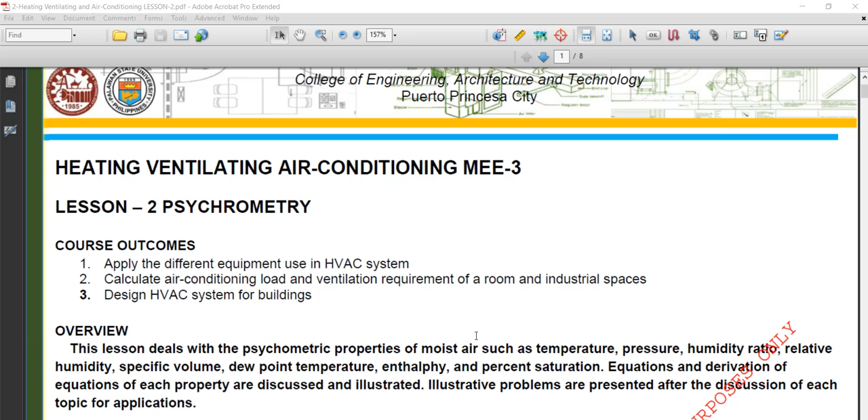So we'll continue our lesson on psychrometry. The overview of this lesson deals with the psychrometric properties of moist air, such as temperature, pressure, humidity ratio, relative humidity, specific volume, dew point temperature, enthalpy and the percent saturation. We also have the equations and derivations of each property that will be discussed and illustrated in the problems presented for this topic.

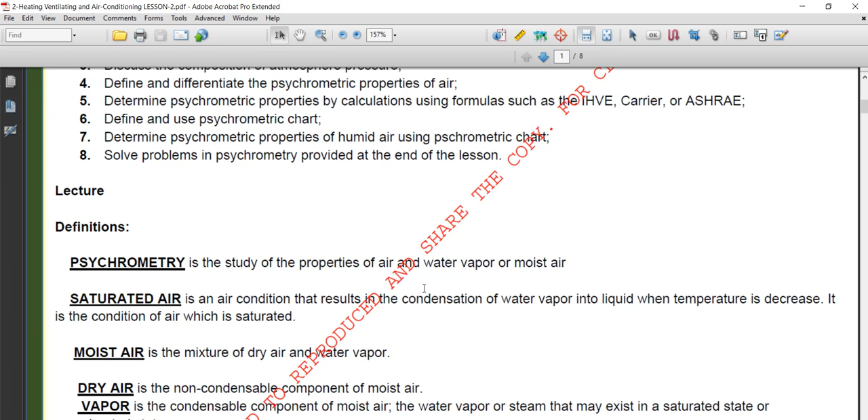So we have your definitions. Psychrometry is the study of the properties of air and water vapor, or moist air. We have also the saturated air. It's an air condition that results in the condensation of water vapor into liquid when the temperature is decreased. It is the condition of air which is saturated.

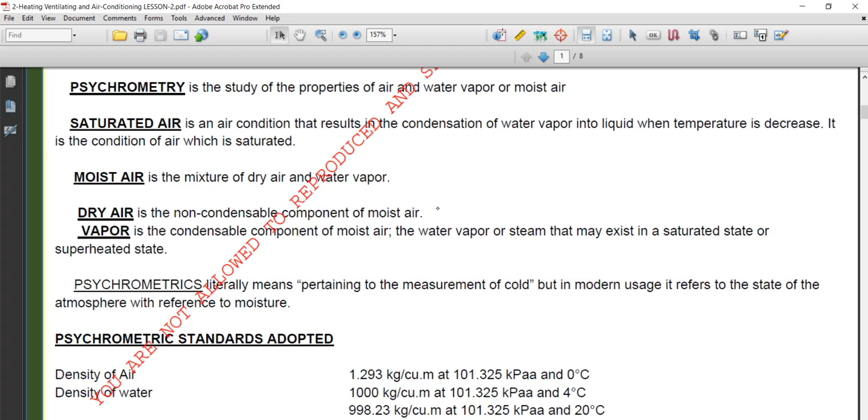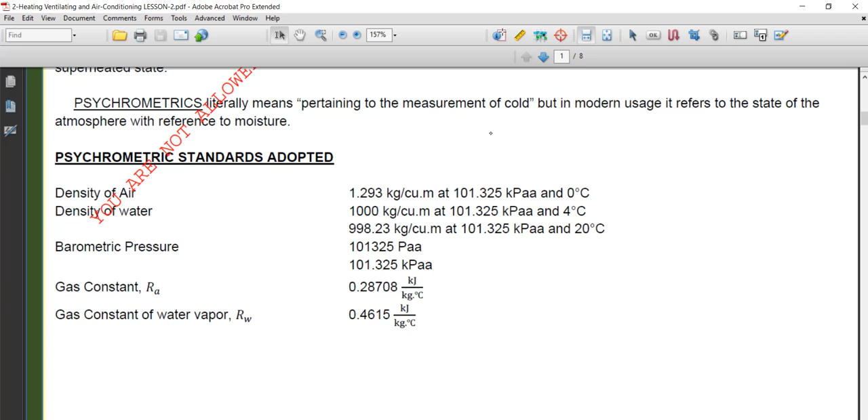Okay. So we have also the moist air. It's a mixture of dry air and water vapor. Dry air is defined as the non-condensable component of moist air. Vapor is the condensable component of moist air. So you have your water vapor, steam that may exist in saturated state or as superheated steam. Psychrometrics literally deals with the measurement of cold, but in modern usage, it refers to the state of the atmosphere with reference to moisture.

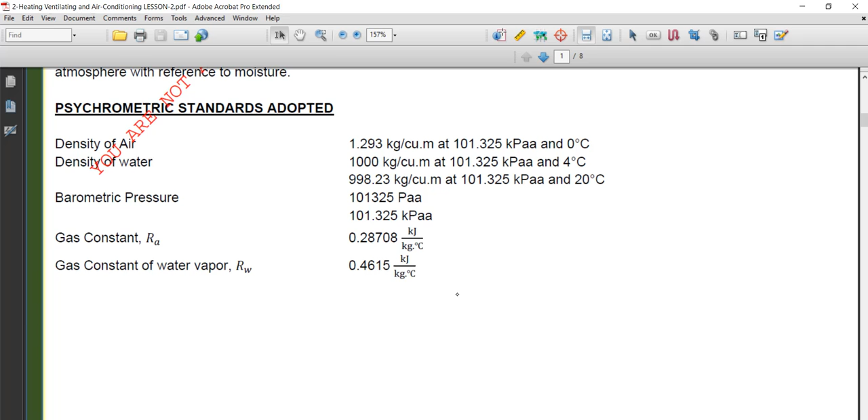So we have your standards that we will be using more often: the density of air, that is 1.293 kg per cubic meter at the standard of 101.325 kPa and 0 degrees. The density of water is 1000 kg per cubic meter, also at atmospheric pressure 101, but the temperature is 4 degrees. We have also barometric pressure and gas constants, and these you've mostly encountered already in our subject, thermodynamics, no?

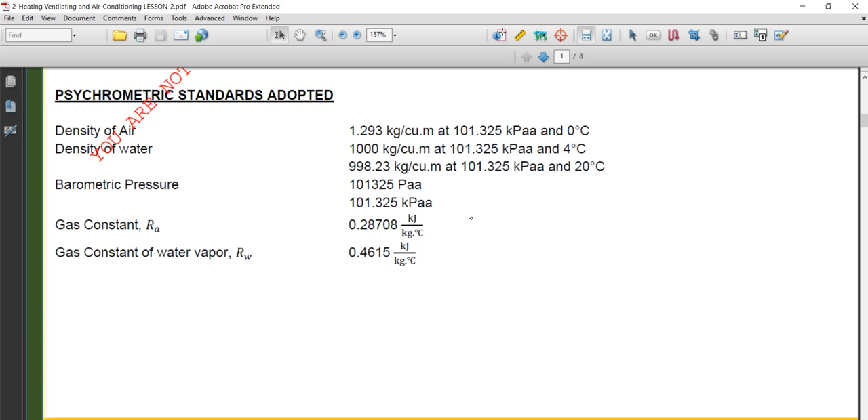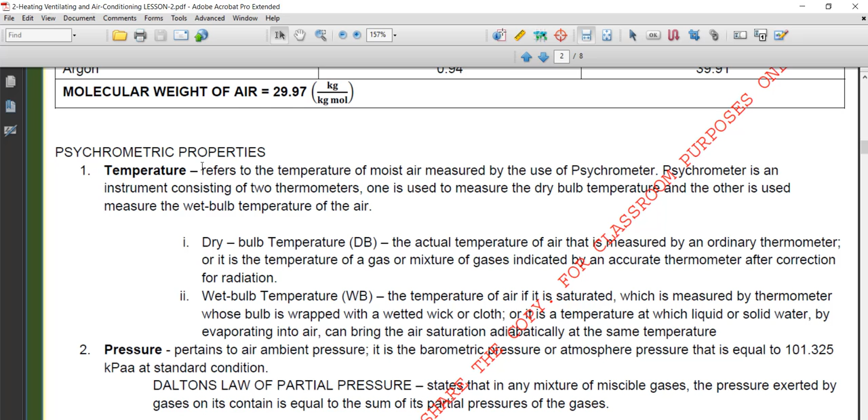Okay. So we have the psychrometric properties. The temperature refers to the temperature of moist air measured by the use of a psychrometer. A psychrometer is an instrument consisting of two thermometers. One is used to measure the dry bulb temperature, and the other is used to measure the wet bulb temperature of the air. The dry bulb is the actual temperature of air measured by an ordinary thermometer, or the temperature of a gas or mixture of gases indicated by an accurate thermometer after correction for radiation.

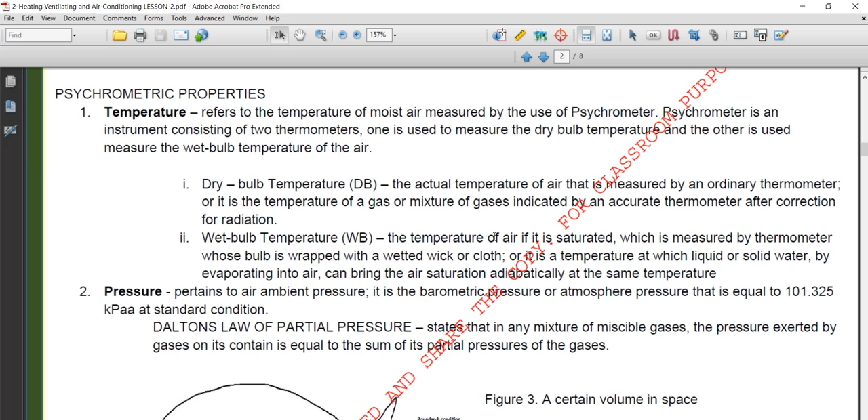We have also the wet bulb temperature, the temperature of air if it is saturated, which is measured by a thermometer whose bulb is wrapped with a wetted wick or cloth, or it is the temperature at which liquid or solid water, by evaporating into air, can bring air to saturation adiabatically at the same temperature.

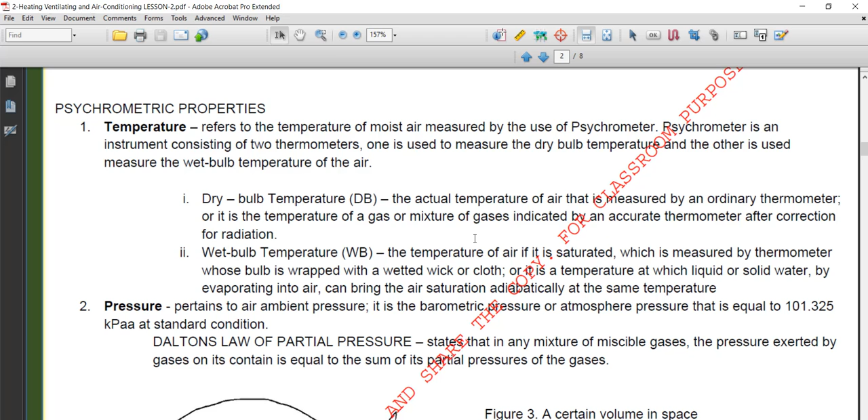So if you can still remember, class, our subject ME Lab 1 or 2, I think it is ME Lab 1 if I'm not mistaken, there is a laboratory conducted there on how to use the psychrometer. Okay? The mechanical psychrometer is composed of two bulbs, one wetted. So I hope everybody performed that activity, or nobody was absent.

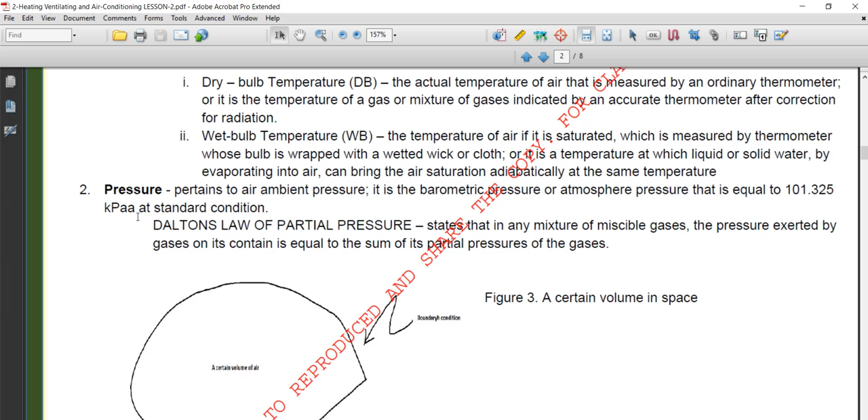So let's go to the pressure. This pertains to the air pressure, if it is barometric pressure or atmospheric pressure, that is equal to 101.325 kPa. So you will have here A, which means that is in the standard condition.

Then if you can still remember, we have your Dalton's law of partial pressure. It states that any mixture of miscible gases, the pressure exerted by gases on its container is equal to the sum of the partial pressures of the gases. So we have your total partial pressure, PT, which is equal to the partial pressure of dry air plus the partial pressure of the water vapor. So take note, we have also the

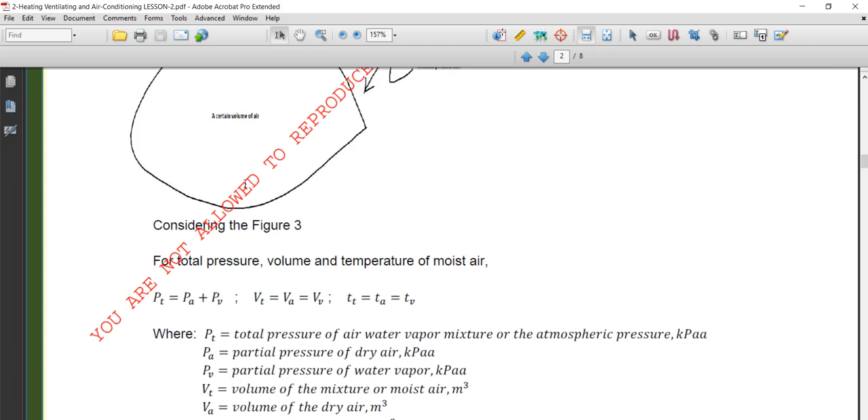relationship within the volume of this container. So the total volume will be equal to the volume of air plus the volume of the vapor. And the same also we have the relationship for the temperature, right? So this is ideally.

Okay, so moving on, we have the specific volume, the volume of unit mass of dry air. We can express that as the volume of air divided by the mass, or we can express the mass by means of PV = mRT. Okay, so cancel out, we have your volume of air in common. Then we have arrived at this one.

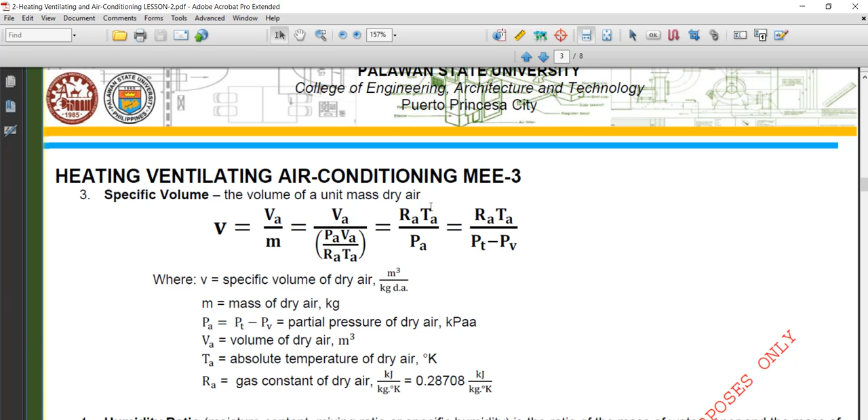Then we have also the partial pressure of dry air. Okay, so that is the total partial pressure minus the partial pressure of the vapor.

Then let's go to humidity ratio. So that is the moisture content. Mixing ratio or specific humidity is the ratio of the mass of water vapor and mass of dry air. So we have the symbol here, W, that is equal to the mass of the vapor divided by the mass of air.

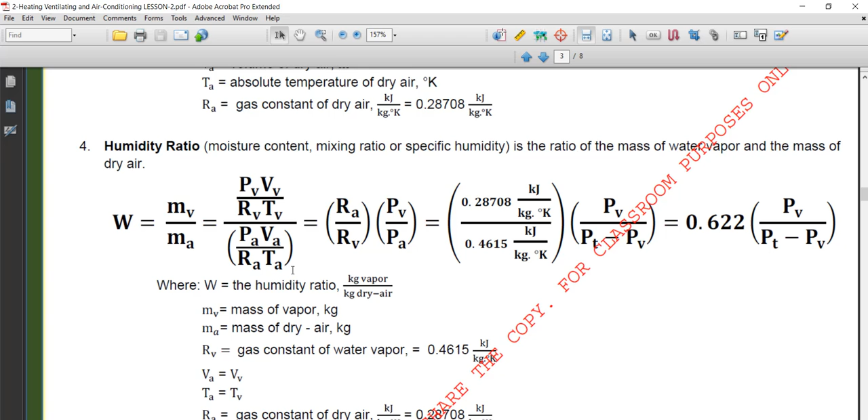Then we can expand the equation by using this one. Okay, so PV = mRT for vapor, and you have your air. Then cancel out what is common. Then finally we have arrived at this one.

Then substituting the value of R of the air and the gas constant of the vapor, we can arrive at this equation, which is 0.622 times the partial pressure of water vapor divided by the total partial pressure minus the partial pressure of the vapor.

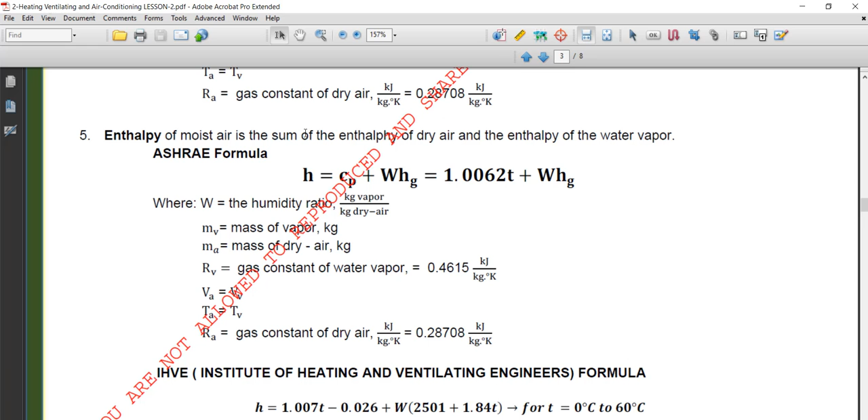Then let's go to enthalpy. So enthalpy of moist air is the sum of the enthalpy of dry air and enthalpy of water vapor. So we have the ASHRAE formula, which will be CP plus, where CP is the specific heat of air at constant pressure, plus the

humidity ratio times the Hg, or we call this the enthalpy. Then it is equal to 1.0062 times the temperature plus the humidity ratio times Hg, or the enthalpy.

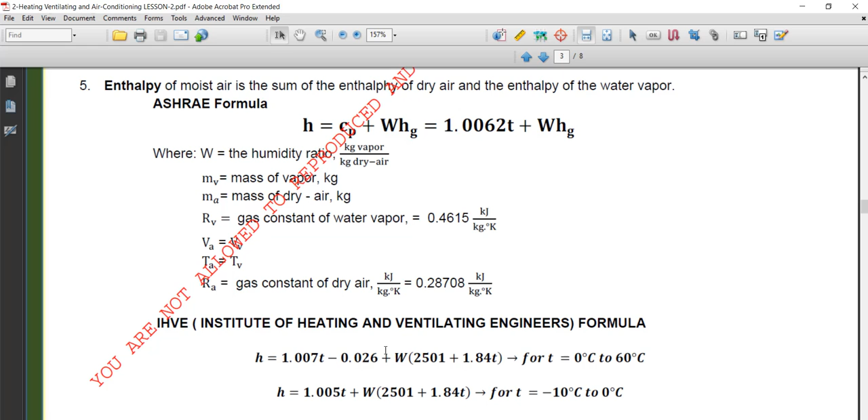So we have from the Institute of Heating and Ventilating Engineers formula, to get the value of the enthalpy: 1.007 times the temperature minus 0.026, plus the humidity ratio, then 2501 plus 1.84 times the temperature. This is for temperature from 0 degrees to 60 degrees.

Then we have also 1.005 times the temperature plus the humidity ratio times 2501 plus 1.84. We have the dry bulb temperature for -10 to 0 degrees Celsius.

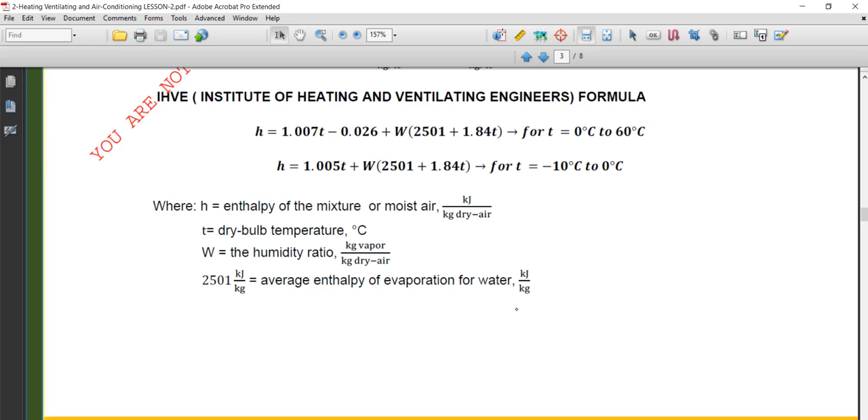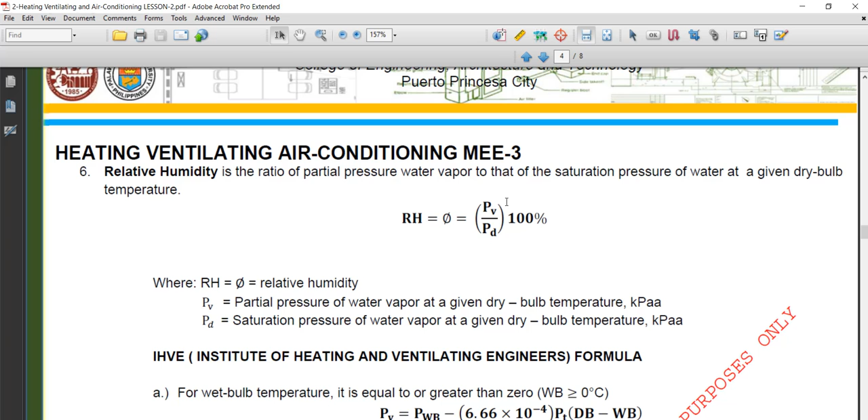Moving on, so relative humidity we have defined as the ratio of partial pressure of water vapor to that of the saturation pressure of water at the given dry bulb temperature. So we have this one: partial pressure over the saturation pressure of water vapor at the given dry bulb temperature, times 100%.

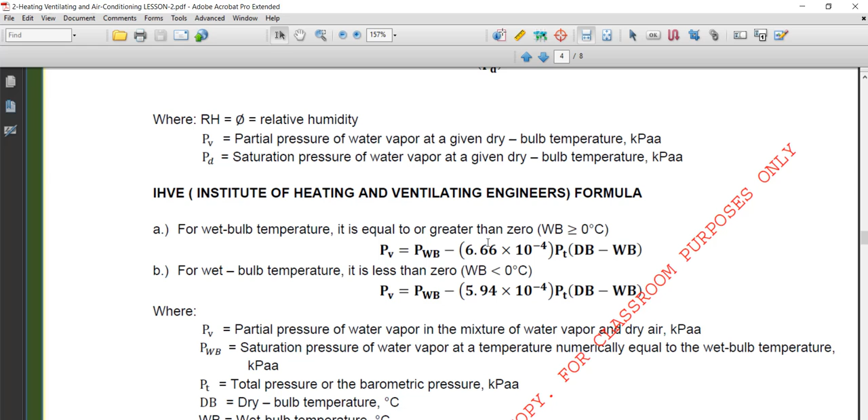Then for from the IHVE, for wet bulb temperature equal to or greater than 0: the partial pressure is equal to the saturation pressure of water vapor minus 6.66 times 10 to the power -4, times the total pressure, multiplied by the dry bulb minus the wet bulb.

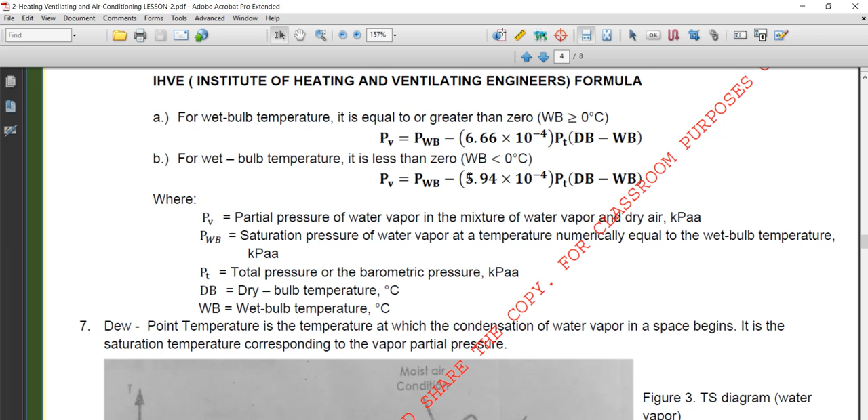So for wet bulb temperature less than 0, with wet bulb less than 0 degrees, we have the partial pressure of water vapor in the mixture equal to the saturation pressure of water vapor minus 5.94 times 10 to the power -4, times the total barometric pressure, times the dry bulb minus the wet bulb.

Okay, so we have the definition for dew point temperature. It's the temperature at which the condensation of water vapor in space begins. So it is a saturation temperature corresponding to the vapor partial pressure.

So looking at the TS diagram we have here, so these are the properties. You have your dry bulb temperature going up here, and you have your dew point temperature going here. Okay, so this is the dew point temperature being mentioned. Then you have your moist air here, then you have your vapor pressure here.

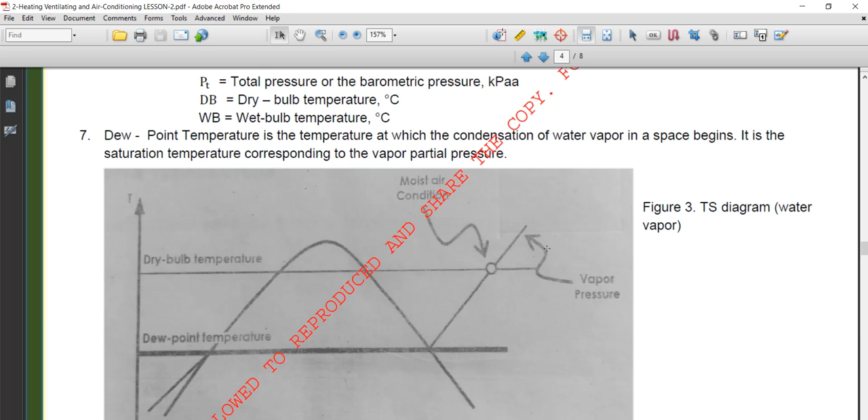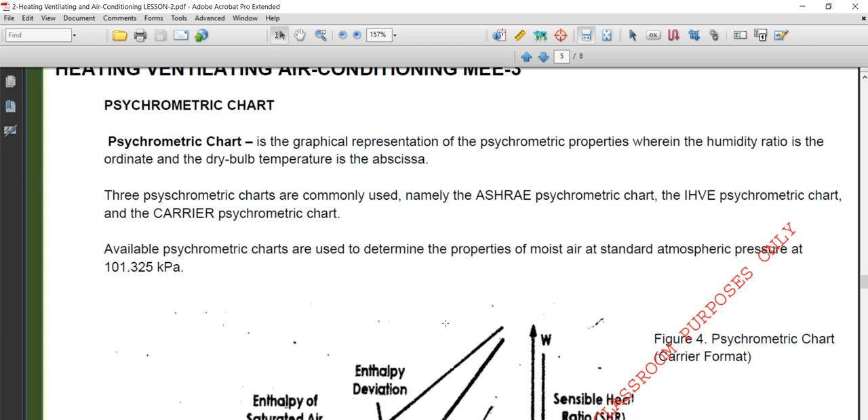Let's go to the psychrometric chart. It's a graphical representation of psychrometric properties wherein the humidity ratio is the ordinate and the dry bulb temperature is the abscissa. So we have the humidity on this side, then the dry bulb temperature going here.

You'll notice we have your dew point temperature, which is when you hit this curve - we have the saturation curve going here. Then we have also the dry bulb temperature going here. Usually all the vertical lines represent the dry bulb temperature.

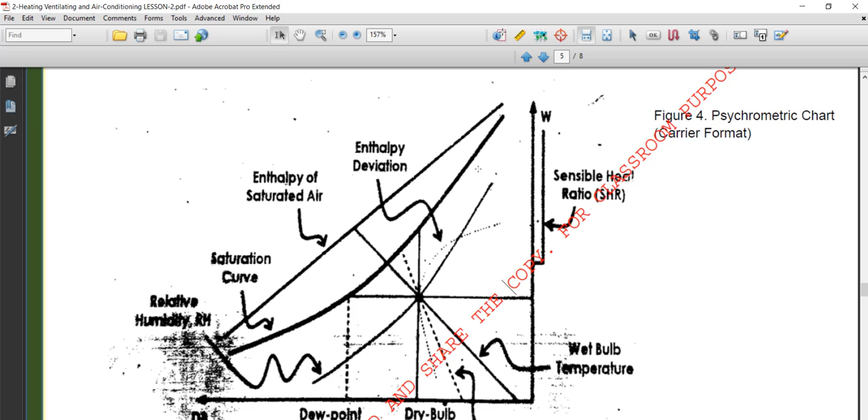So let me show you the actual psychrometric chart. Down here at the bottom, we have your dry bulb temperature. Then we have here your humidity.

The wet bulb - you'll notice the wet bulb line is the slanting one. So this slanting line here is your wet bulb temperature.

Then this line here, all the curving lines, that is the relative humidity. Then we have specific volume.

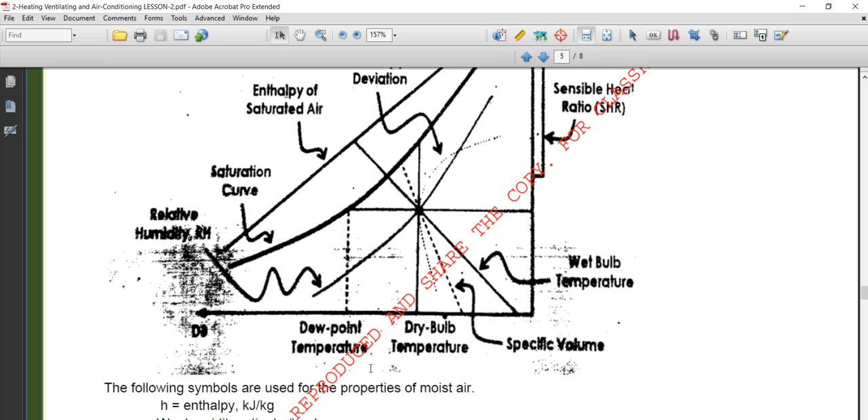Later on we'll be using a chart like this one - that is the psychrometric chart. We also have relative humidity here in the actual chart - we'll discuss that too.

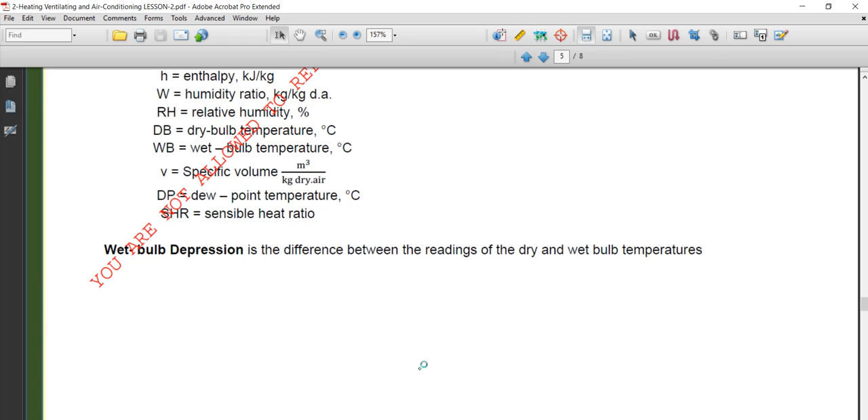So wet bulb depression is the difference between the readings of the dry and wet bulb temperatures.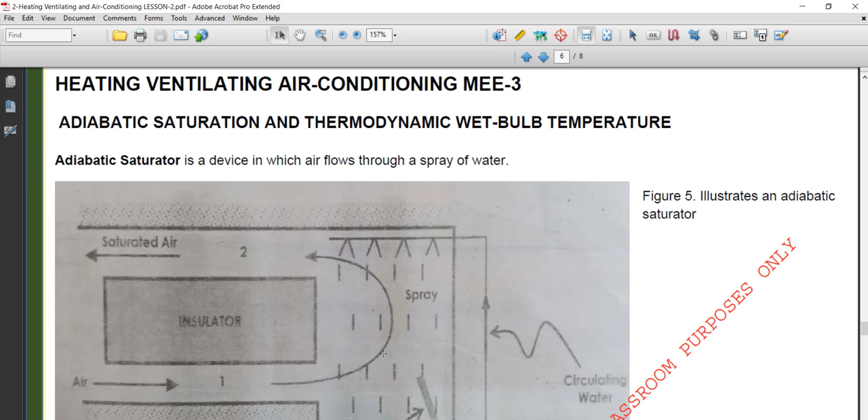We have adiabatic saturation. A saturator is a device in which air flows through a spray of water. So we have the adiabatic saturator - you'll notice here you have a circulating pump, then you have your thermometer, then you have your insulator, and you have air entering.

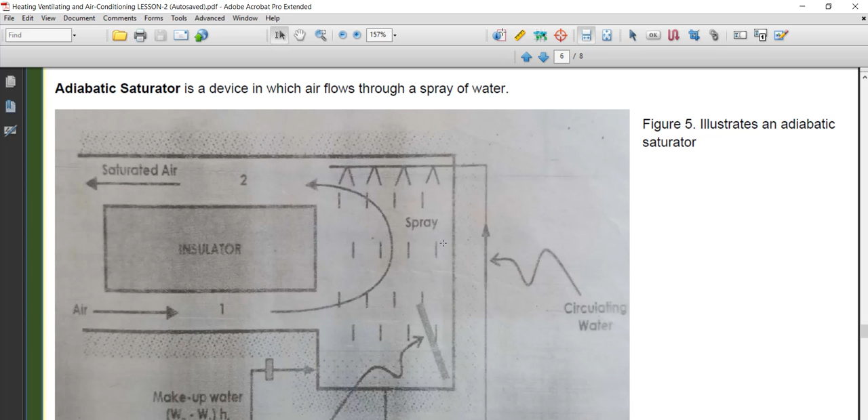The air entering is being sprayed by circulated water - you have here circulated water spray. The air gets moisture from the sprayed circulated water, and that air becomes saturated as it passes through the spray of water. That's why we call it an adiabatic saturator.

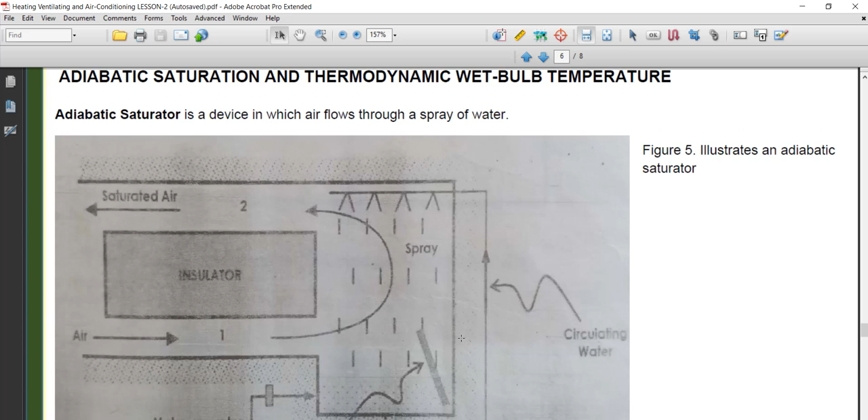You have makeup water, so if the temperature decreases, you just have makeup water to compensate for the loss. We have the explanation here - you can read that. Let's move past that one.

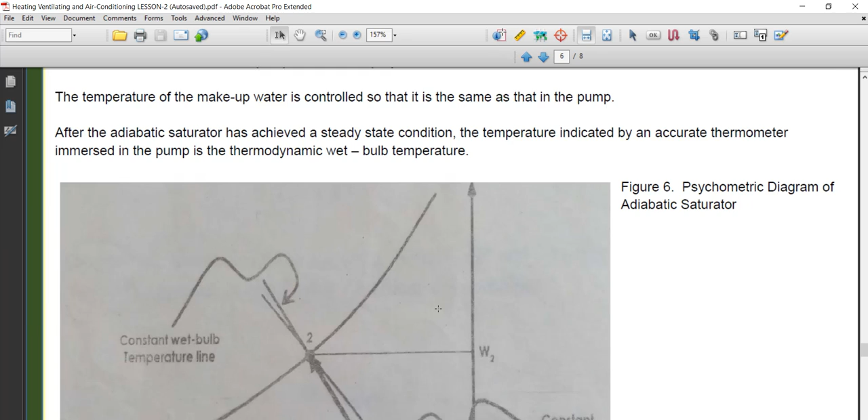After the adiabatic saturator has achieved a steady condition, the temperature indicated by the accurate thermometer is essentially the thermodynamic wet bulb temperature. So we have here the psychrometric diagram of the adiabatic saturator.

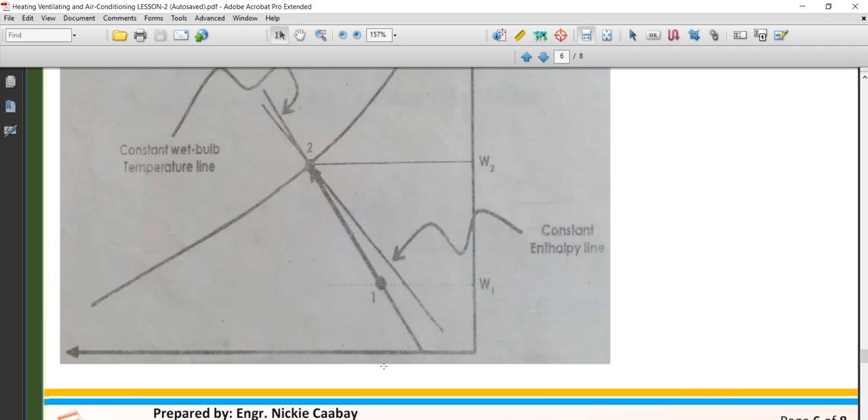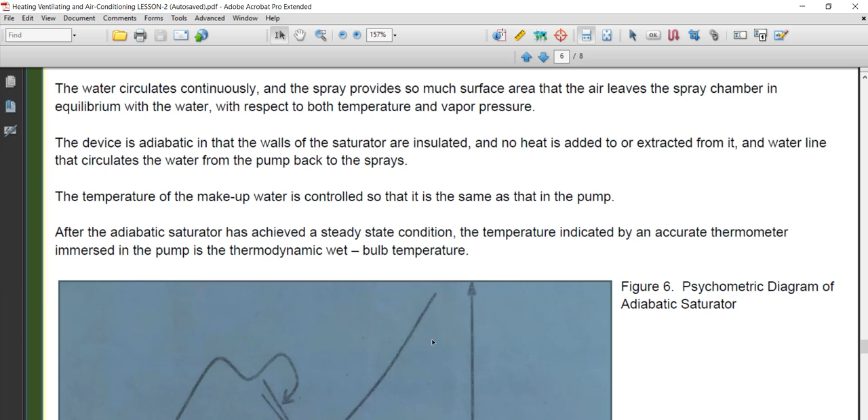You'll notice here you have humidity starting from this point, point 1. Then as you spray the water in a form of mist, the air absorbs moisture, so the air becomes saturated. In Tagalog, it's like the air's moisture content becomes higher - parang mamasa-masa, that explains it.

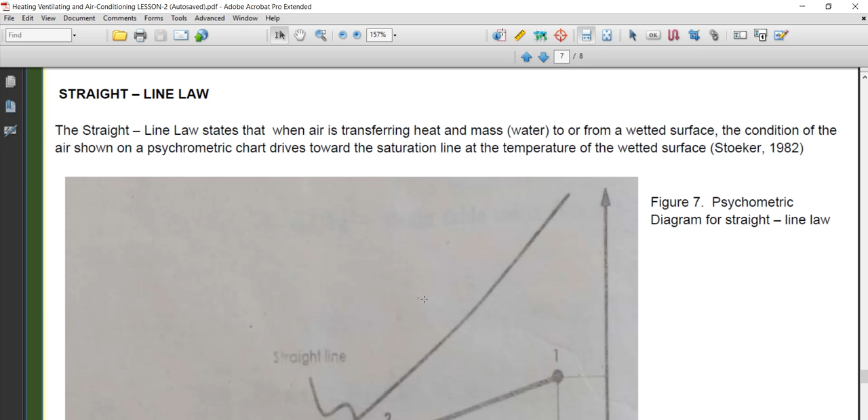Then we have the straight line law, which states that when air is transferring heat to or from a wetted surface, the condition of the air shown in the psychrometric chart drives toward the saturation line at the temperature of the wetted surface.

So we have here the straight line law - from here, going here. At every point, if we want the air to become saturated, we just draw the line or do the process going toward the saturation curve, since this is the saturation curve. So from point 1 to point 2, that's the straight line law in order to become saturated.

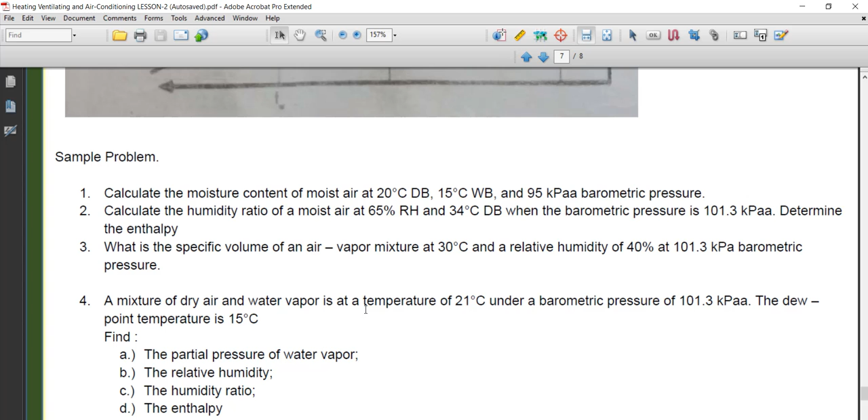So we have a sample problem. Let's do a sample problem - calculate the moisture content for number 1. So we have the given.

For this problem, we have the partial pressure, which is equal to total pressure of 95 kPa absolute. Then we have your wet bulb, which is equal to 15 degrees Celsius. Then we have your dry bulb, which is equal to 20 degrees Celsius. Now the required, or the unknown, is the moisture content, which is W.

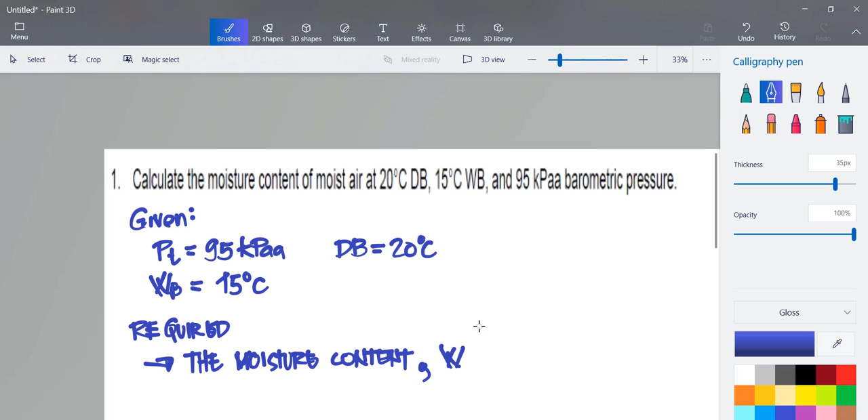So for the solution, let's use the determination by means of the steam table, looking for the value of the humidity ratio. First we have to go to the steam table.

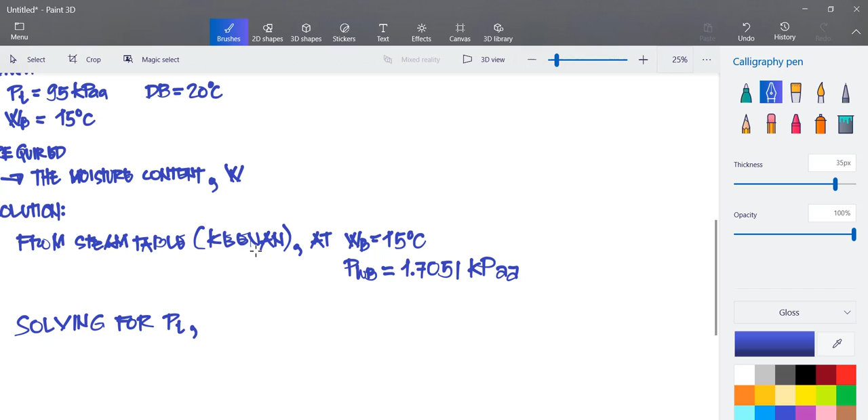Okay, so continuing with the solution, we'll be using 1.7051 kPa. So for the solution, solving for your total partial pressure, this is your PT. So we have the equation, which is...

So using the formula from the IHVE, defining this one, from the Institute of Heating and Ventilating Engineers, we have the equation. So for wet bulb temperature equal to or greater than 0, we can use this one. But for wet bulb temperature less than 0, we use this other one. Since our wet bulb temperature is greater than 0, we'll be using this one.

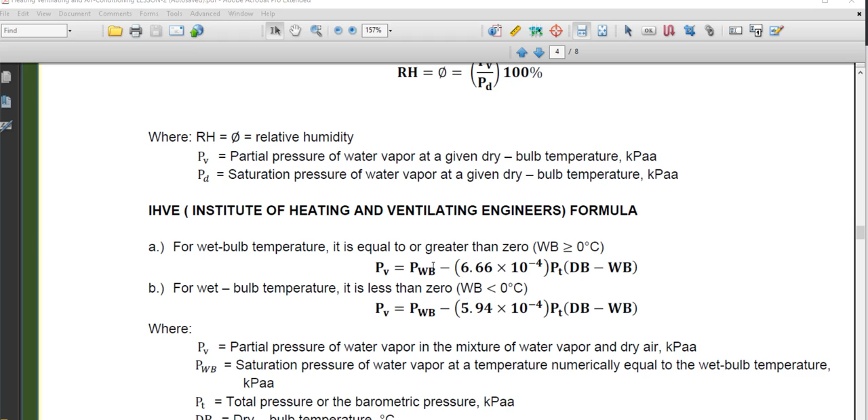So the partial pressure of vapor will be equal to the pressure at wet bulb minus 6.66 times 10 to the power of -4, multiplied by the total partial pressure, then multiplied by the dry bulb temperature minus the wet bulb temperature. So let's substitute the values here.

So pressure at the wet bulb will be 1.7051 kPa, minus 6.66 times 10 to the power of -4. Then we have the total partial pressure, which was given earlier as 95 kPa absolute. Then our dry bulb temperature is 20 degrees Celsius, minus our wet bulb temperature, which is 15 degrees Celsius.

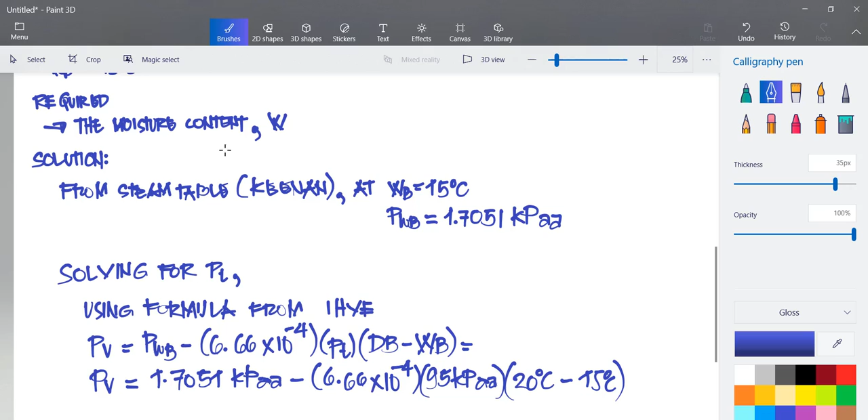So you notice the pressures here are different, so this is a derived formula. Let's focus now, there will be no further derivation for this one, so we have the value. This is a direct substitution of the values, so we'll not be considering the cancellation of units, but actually it will cancel out. Let's focus on the solution as a direct substitution. Then finally we have the partial pressure of the vapor, that will be 1.38875 kPa. This will be on the absolute scale.

Now solving for the humidity, we have the equation where your humidity ratio equals 0.622 multiplied by the partial pressure of water vapor divided by the total partial pressure minus the vapor partial pressure. So we have the humidity, substituting the value we got earlier, which is 1.38875 kPa absolute.

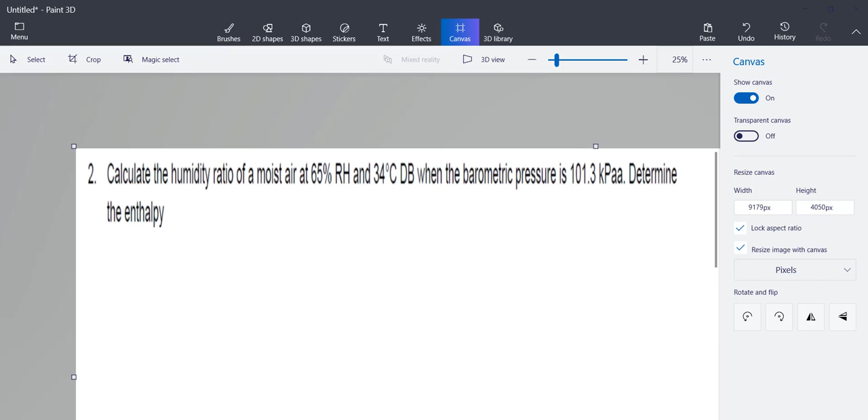So for question number 2, calculate the humidity ratio of moist air at 65%, 34 degrees Celsius dry bulb, when the barometric pressure is 101.3 kPa, and also determine the enthalpy. Okay, so first thing first, let's identify what is given in the problem.

So we have RH, that will be 65%. Then we have your dry bulb, that will be 34 degrees Celsius. Then we have total partial pressure, which is equal to 101.3 kPa absolute. So the required, or the unknown, in the problem, we need to determine the humidity ratio.

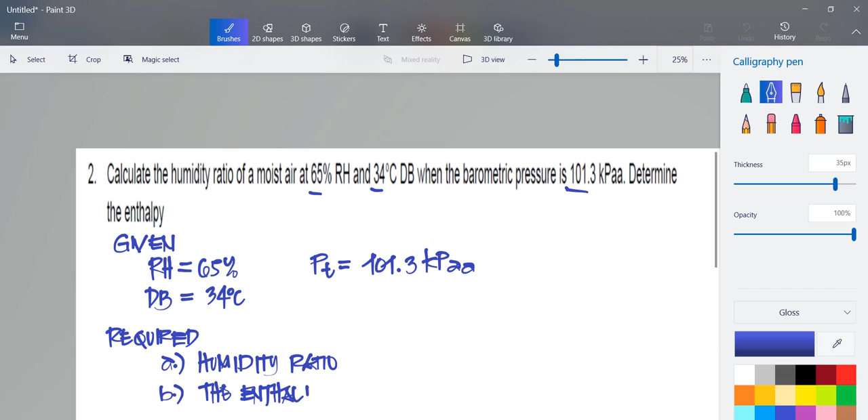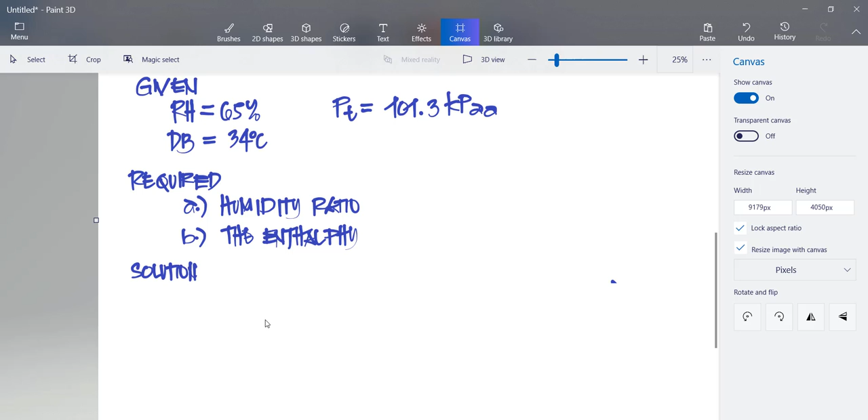So B, so the enthalpy also. Okay. So for the solution, let's go to the solution now. So first things first, class, we need to establish the equation to get the humidity ratio first. So the equation for the humidity ratio, we have W, humidity ratio, that will be 0.622 multiplied by the partial pressure of water vapor divided by the total pressure minus the partial pressure. Okay.

So from here, we can determine what will be the unknown. We have the total pressure, which is here. So we have the total pressure already. What we don't have is PV, partial pressure of vapor. But we have the equation, which is your RH, or relative humidity. So RH is equal to the partial pressure of vapor divided by the saturation pressure of water at the given dry bulb temperature, multiplied by 100%.

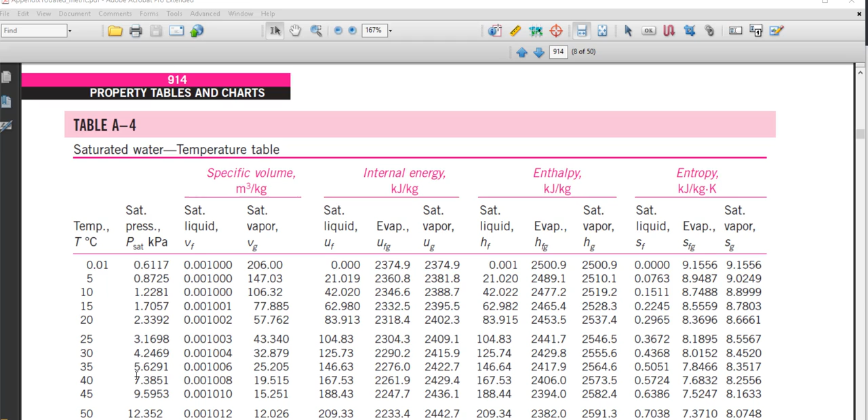So let's try to interpolate this one. We have 30, then 34, and then 35. The saturation pressures corresponding to these are 4.2469, then X, then 5.6291. So interpolating: 30 minus 34 over 30 minus 35 equals 4.2469 minus X divided by 4.2469 minus 5.6291. Continuing that one, we'll continue here. Let's put a border here.

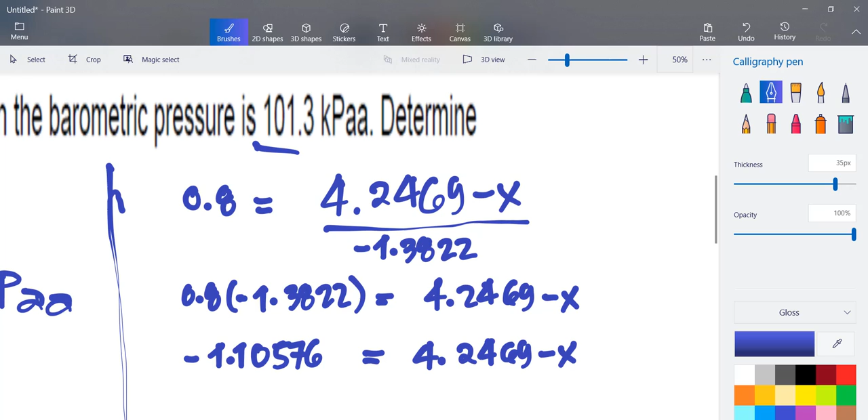This will become 0.8 is equal to 4.2469 minus x divided by the value below. How much is that? It will be negative 1.3822. So 0.8 multiplied by negative 1.3822 is equal to 4.2469 minus x. Resolving this first, negative 1.10576 is equal to 4.2469 minus x. Now I'm going to transpose this to the other side. x is equal to 4.2469 plus 1.10576. So finally, we have the value of x, which is 5.35266 kPa absolute.

To check if our value is correct, it should still be in between. You will notice here it is 5.6291 and we have 5.35266, so we're still in between. That is the right way of checking whether your interpolation is right or wrong. If it became 5.7, there must be something wrong with the interpolation or your use of the equation. Maybe you made a mistake with the signs or dividing on the calculator. Please take note of that; it's very helpful when using interpolation.

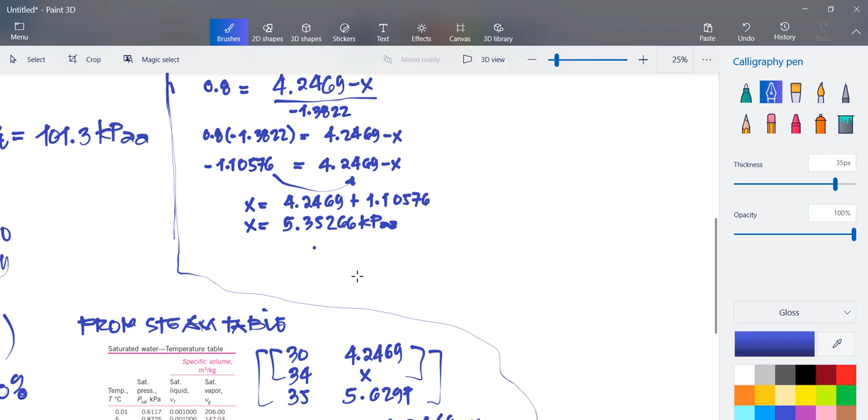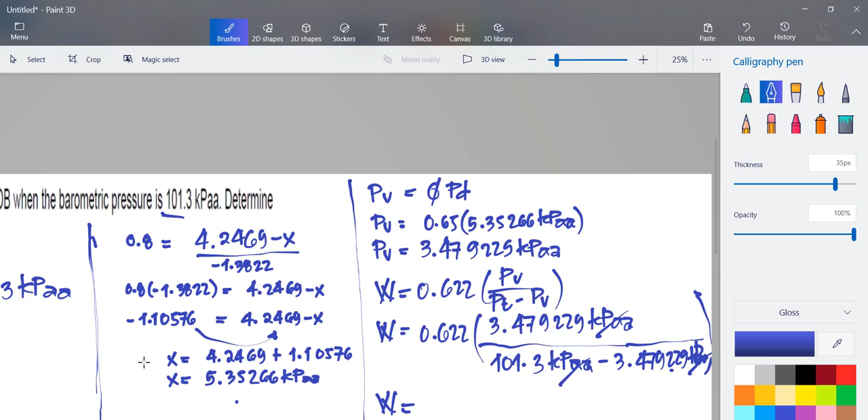Continuing, from our humidity ratio equation, that will be 0.622 times PV, partial pressure of vapor, over total pressure minus the partial pressure of vapor. Substituting the values, 0.622 multiplied by 3.479229 kPa absolute, divided by 101.3 kPa absolute minus 3.479229 kPa absolute. Close parenthesis. Cancel the units. Using our calculator, the humidity ratio is 0.0221 kilogram of vapor per kilogram of dry air.

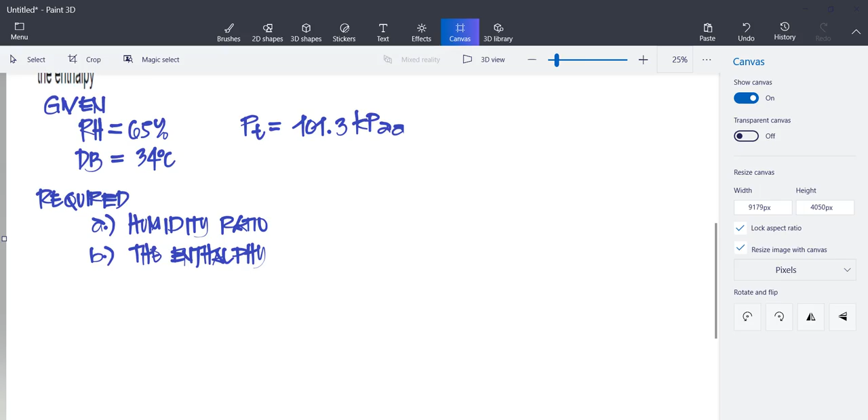Kilogram per kilogram dry air. So we have the answer. Okay. So next, determination of the enthalpy. So solving for the enthalpy, we can use the formula. We can use the ASHRAE formula and also this one. So let's try to use this one and this one.

So we have the value of your humidity, and we have the value for this one. Now what we don't have is this one, but we have the temperature, which is our dry bulb temperature, 34 degrees Celsius. So we need to determine the value here. So going back again to the steam table.

So looking at our steam table, you'll notice here, that will be saturated. Since this is 34, we have to interpolate again. So earlier, we were referring to our previous values. So the value is 0.8.

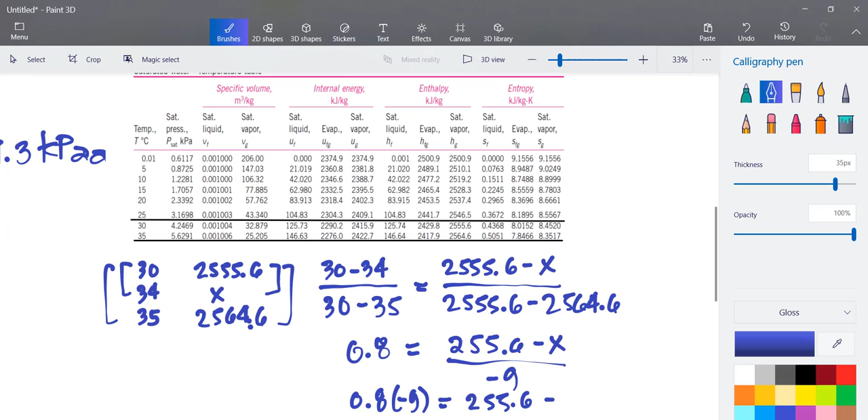Now for the lower one, this will be 2555.6 minus x, divided by -9. So transposing, 0.8 multiplied by -9 will be equal to 2555.6 minus x. Resolving the value on the other side, we have -7.2 is equal to 2555.6 minus x. So transposing, we have 2555.6 plus 7.2.

So using our calculator, we have the value of 2562.8 kilojoule per kilogram. Checking that one, 2562.8 is in between 2555.6 and 2564.6. So we are on the right path.

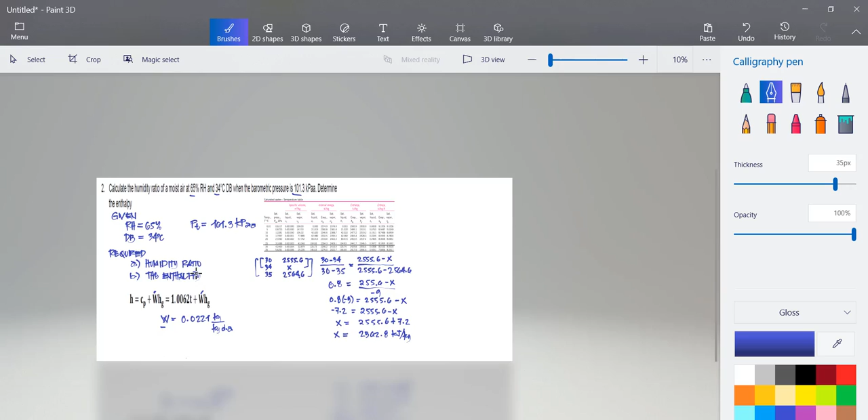So substituting it in the equation, h equals 1.0062 multiplied by the temperature, 34 degrees Celsius, plus the humidity, 0.0221 kilogram per kilogram of dry air, multiplied by the enthalpy, 2562.8 kilojoule per kilogram. Cancel out the common units, and this one will be cancelled out since this is the specific heat, Cp.

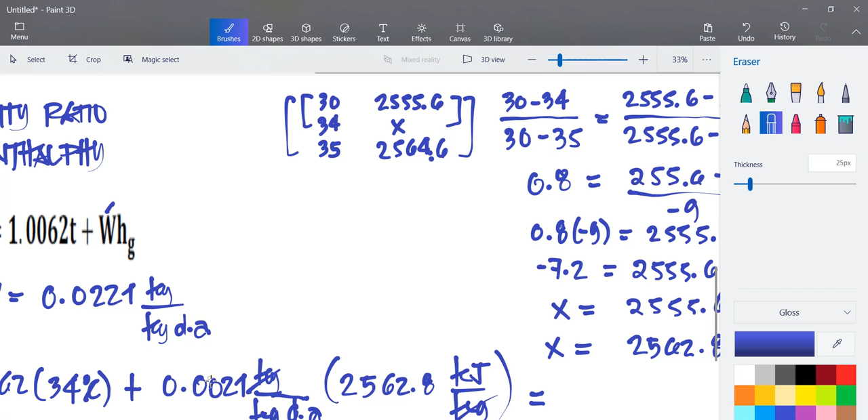So finally we have the answer. Sorry, this is where we made a mistake, so I'll erase this one and replace it with 0.0221. So we have the answer of 90.85 kilojoule per kilogram. So that is by using the equation from the ASHRAE formula.

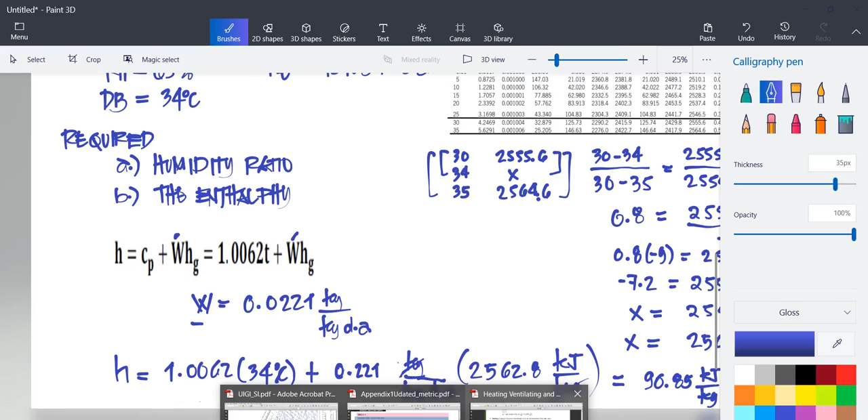Now let's try to use the equation from the IHVE. For temperatures 0 degrees to 60 degrees, since the temperature we are using here is the dry bulb temperature, we will be using this part. So using the IHVE equation for 0 to 60 degrees, we have the values for temperature and humidity, so we can directly substitute.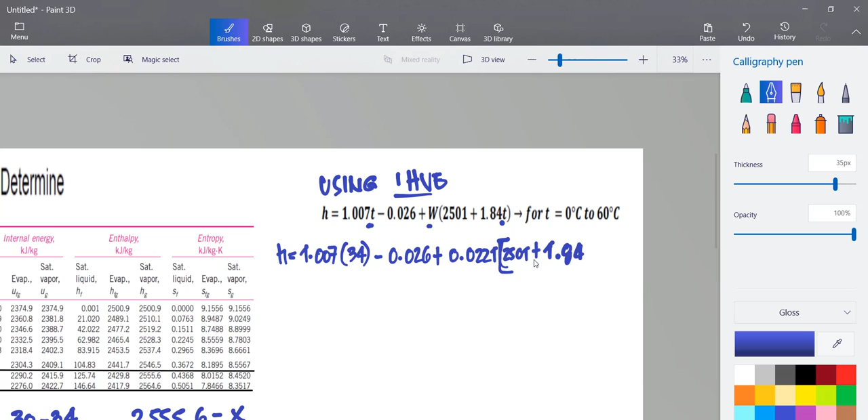That will be 1.007 times 34 minus 0.026, plus the humidity 0.0221 multiplied by 2501 plus 1.84 times 34 in brackets, then we have your enthalpy value. Calculating this, we have the value 90.862.

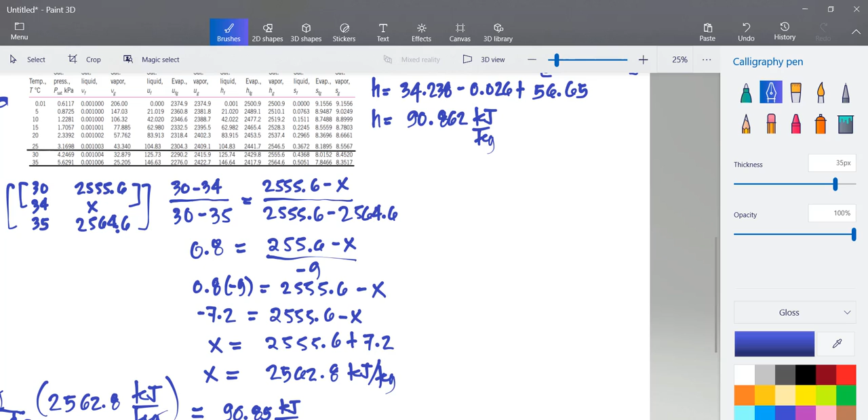Referring to earlier, we have a little difference, but only in the decimal places. At least their values are close, so we can use either one. Okay, so what I've done here, I brought down the psychrometric chart we discussed earlier.

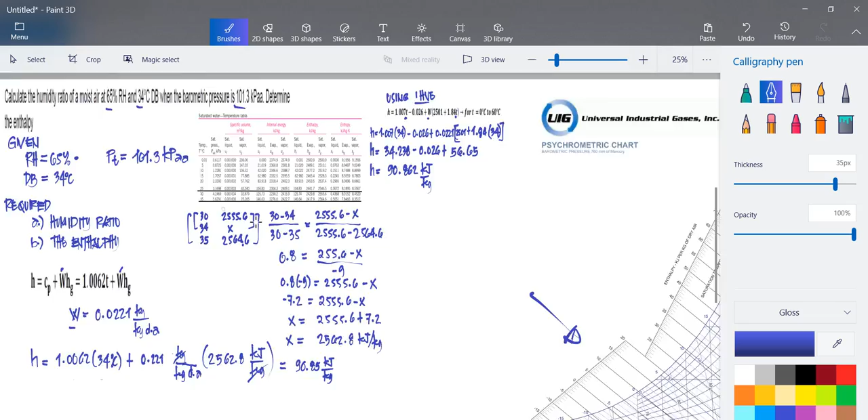So from the data we have, we try using the psychrometric chart, plotting the data we have to determine the enthalpy. First we have 34 degrees, so let's plot that one. You will notice this is the dry bulb temperature. So that is 34. We have here 20, 30. It runs across here, so we can plot that one.

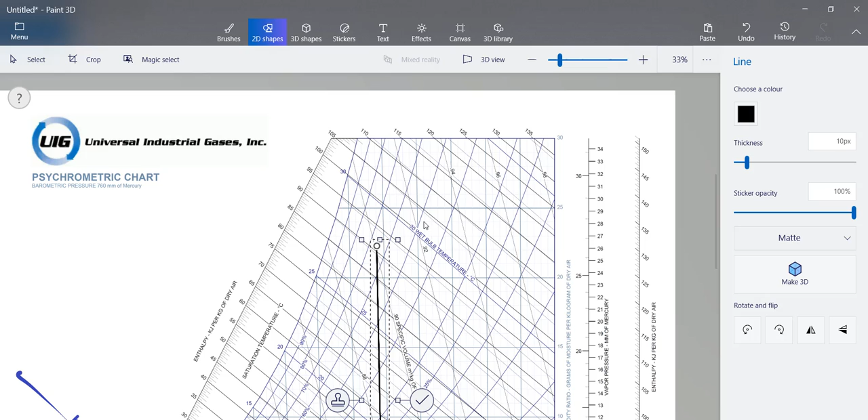Let's plot that one. Let's draw a line going from here, that is 30, so that it will be parallel, sorry, it should be here, parallel to the vertical line going up. Let's change this one. So it is 34 starting here.

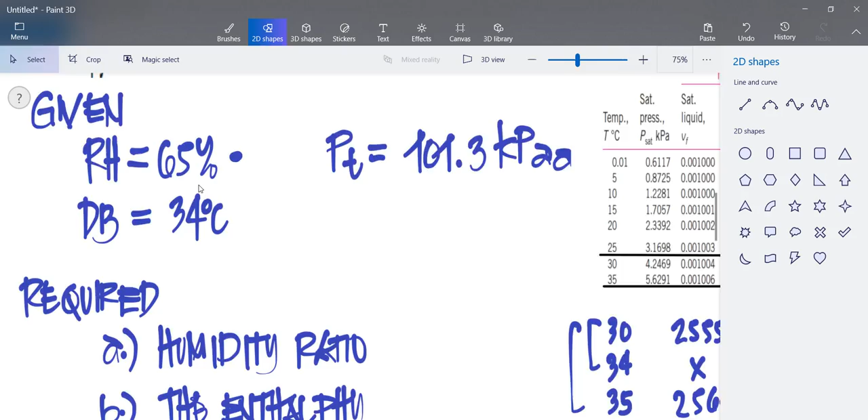So it is traversing, no? Okay, drop that one, that is 35 or 34 down there, so it is going up there. Now the data we have is 65 degrees, 65% RH. So relative humidity, the line here, class, this is now your relative humidity. You will notice that is 60, so it is in between 60 to 70. So from here going here, it is somewhere here, in the middle.

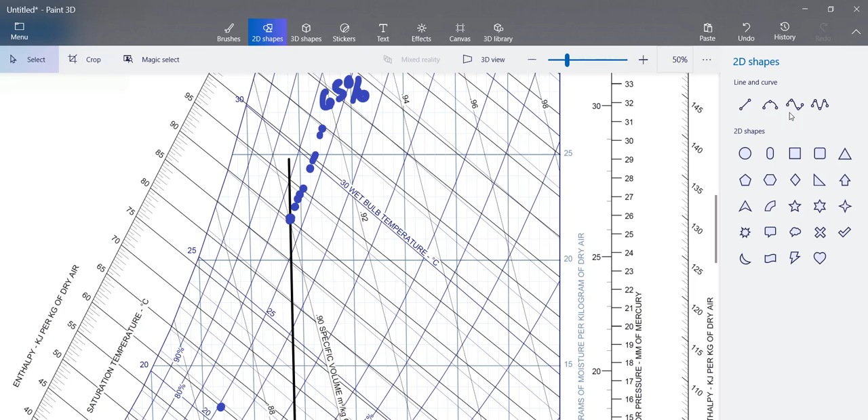So this is the 65% RH. Okay, then let's draw a line here going here, so it goes here. Okay, so the data we have here is the humidity ratio. So this is the humidity ratio, no? What we have here is the humidity ratio,

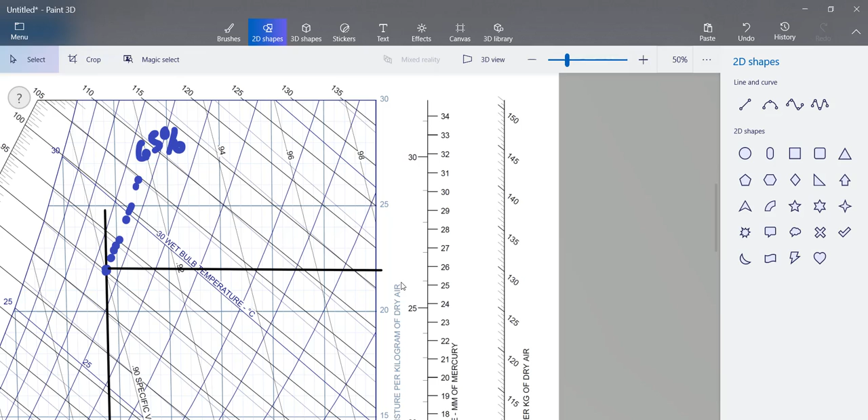which is this W. This is the W, which is equal to 20, this is 21, 22. So we have 22 grams per kilogram dry air, or in the equation it becomes 0.022 kilogram per kilogram dry air. Okay, so that's how easy it is to find on the psychrometric chart.

Then what we're looking for is the enthalpy. Now enthalpy, here we have the value for the enthalpy, no? So plotting it here going there, let's draw a line starting here going there. Okay, so what we have now is 90, so this will become 90 kilojoules per kilogram. Okay, so it is almost the same, no?

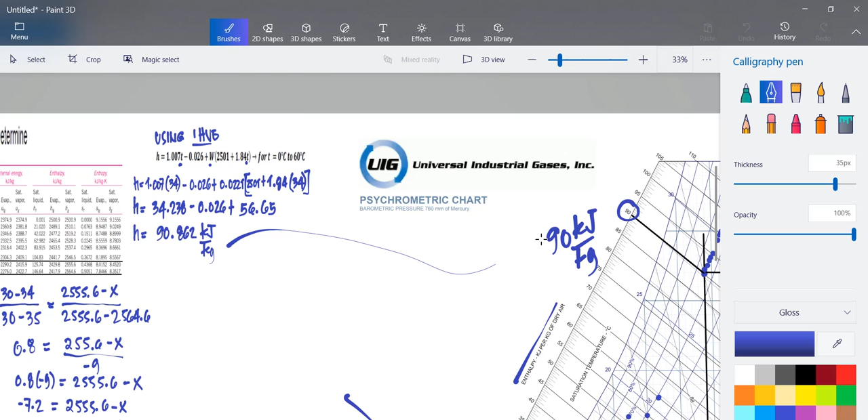Yeah, so you will notice, class, how efficient it is using the psychrometric chart. Then we have your humidity ratio, and the corresponding wet bulb, you can see it, we have your wet bulb here. This line traversing going there is the wet bulb temperature. And this is the saturation curve, and this is the enthalpy.

Now if you want to look for the wet bulb, you just simply plot it here. So this is our wet bulb. Wet bulb temperature starts from here, that is 25, and between 25 and 30, so this is around 27 degrees wet bulb temperature, no? For the specific volume, we have the line here.

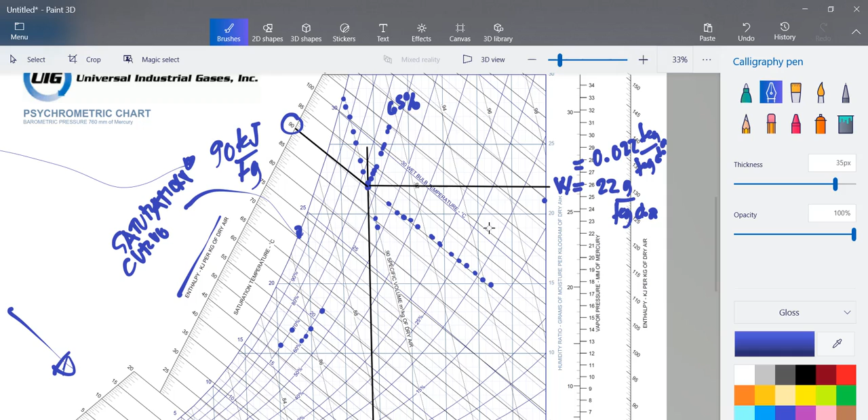Specific volume has the unit of cubic meter per kilogram of dry air, so we have the line traversing here. If you want to determine the specific volume, you just look in this line. So what we have here is 88, 90, 92, 94, 96. So what we have here is 0.90 cubic meter per kilogram. That is the specific volume of air at this point. Okay, so that is how we use the psychrometric chart.

And also you will notice here, going here, we have also the enthalpy. So it's the same, no? It just passes through going here and going here. Now we have also the vapor pressure here, in mm of mercury. It's around 26, no? So let's try to convert that one. What we have is 26 mm of Hg. Let's convert this to kPa and see if it is the same value that we have.

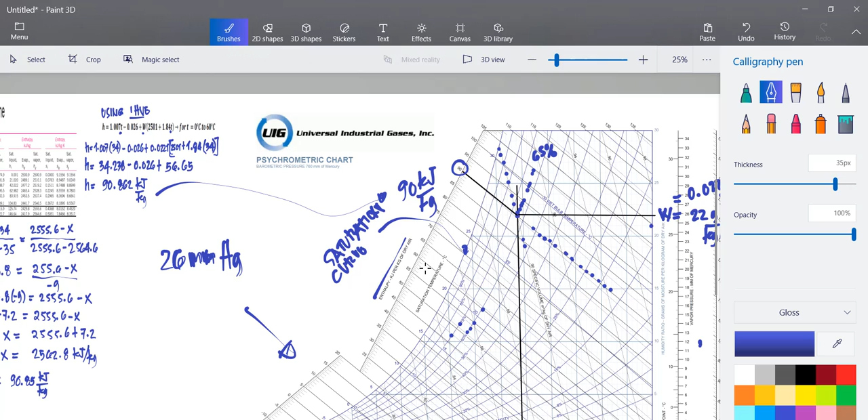So we have 26 mm of Hg. Let's convert this one. We have a conversion, no? 1 mm of Hg is equivalent to 133.3 Pascal, correct? Okay, so this is now the Pascal. So let's multiply that one.

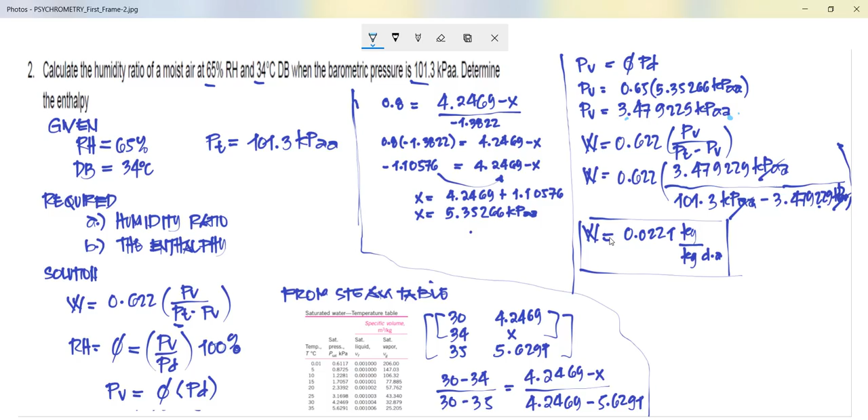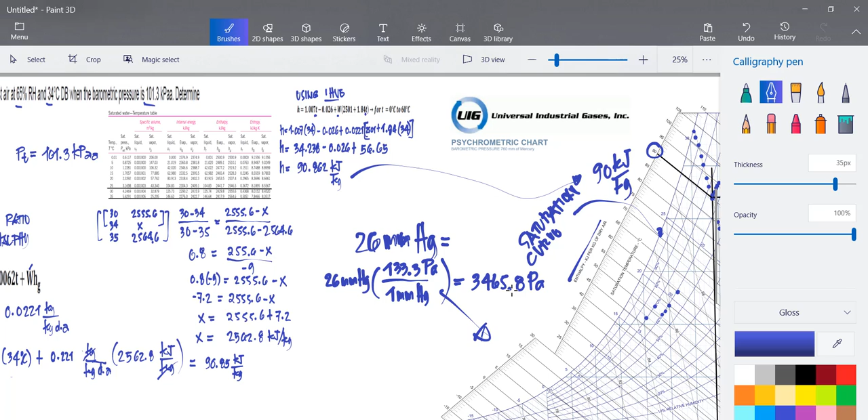What we have is 3465.8 Pascal. Referring to your partial pressure of vapor earlier, that is 3.4792, so it is almost the same value. So 3.47 partial pressure of vapor compared to this value. You just have to convert it to Pascal to get the value. So that is what we got here by using the psychrometric chart. This is how easily we can get the value. Earlier we got the value by means of computation, and now by means of the psychrometric chart. So that is the comparison. Okay.